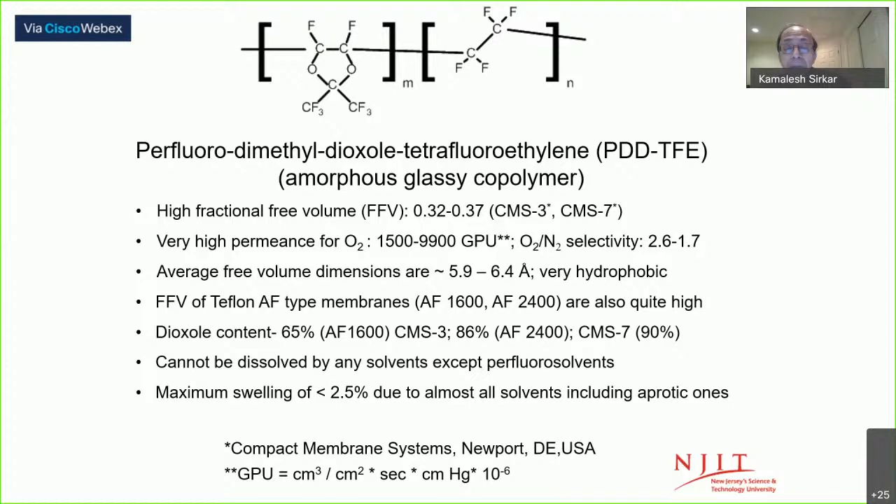These polymers cannot be dissolved by any solvent except perfluorosolvents. And we have studied their swelling in all sorts of solvents, including DMSO, DMF, NMP, etc., and it's less than 2.5%. And so those are very useful for the purpose of separation of organic solvent mixtures.

I'm repeating that information at the top left part of this slide. The CMS7 has average free volume radii of 5.9 to 6.4 angstroms. Corresponding radii estimates in normal glassy polymers are going to be around 3 to 4 angstroms at the most.

And interestingly, most organic solvents, if you think in terms of their diameters, by assuming these are spheres, that's around 5 to 7 angstroms. They'll slip through CMS7 without much diffusivity-based selectivity. And need I remind you that selectivity of separation through a polymeric membrane is usually considered to be a product of diffusivity selectivity and solubility selectivity.

So if in fact we have such large free volume dimensions, and we have such large fractional free volumes, how can you have any diffusivity-based selectivity? These molecules are just going to slip right through every one of them. And so selective sorption potentially could be very interesting.

And there have been some studies that were initiated in the last 15, 20 years, quite a few studies. And they have been looking at the free volume size distribution using the PALS technique and so on and so forth. So my information regarding the average free volume dimension, 5.9 to 6.4, is based on some of those studies.

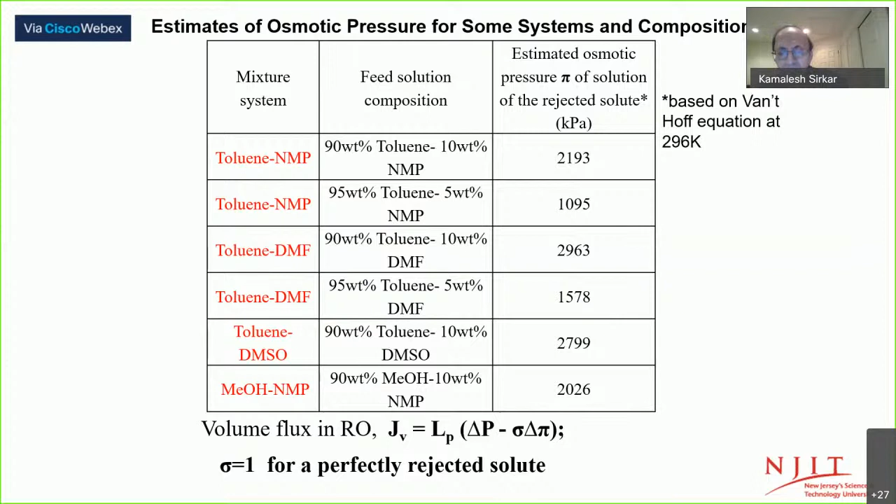So here we are showing data on a mixture of toluene and NMP. If we have 95 weight% toluene in feed, 5% NMP, or 90 weight% toluene or 75 weight% toluene, and if we apply appropriate pressure, what we see is that the permeate coming out has pure toluene. We were surprised and very shocked at this because this is unusual.

Of course, the fluxes are somewhat on the low side. You see the pure toluene fluxes are significantly higher. That, of course, reflects the fact that we have a significant osmotic pressure. But we are getting pure toluene in the permeate over this concentration range.

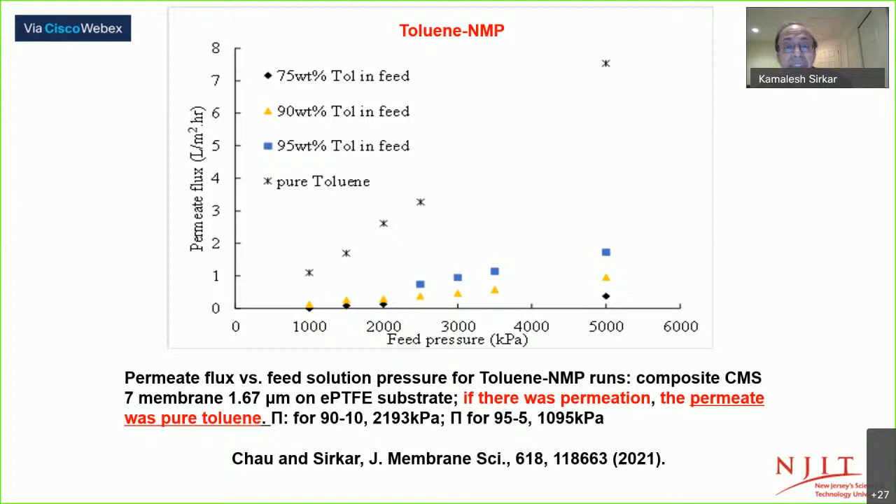But before I go into that, I wanted to show you something. We took this polymer and soaked it for 14 days in feed mixtures that contain either 90% toluene, 10% NMP, or 90% toluene, 10% DMF. And then took this polymer out and put it in a headspace device.

Connected to a GC gas chromatograph and stripped out the sorbed solvents at a high temperature. And what we found out is that the sorbate was 100% toluene in both of these cases. In other words, toluene is not allowing NMP and DMF to be sorbed in this particular polymer. This is a phenomena that we will see repeated with various other compositions that we'll talk about.

Now, if I can recall some of the very basic conclusions known to membrane scientists and engineers, if you take the Spiegler-Kedem model for reverse osmosis, you achieve a very high solute rejection when you go to very high delta P, and that value is equal to the solute reflection coefficient. If you use irreversible thermodynamics models, you see at very high pressures you achieve a solute rejection that's 1 minus the solute partition coefficient. In our case, if the solute is being rejected completely, sigma sub j would be equal to 1 and kappa sub j is going to be 0. So we'll be having a rejection of 1. But interestingly, we achieve that rejection of 1 at very low pressures.

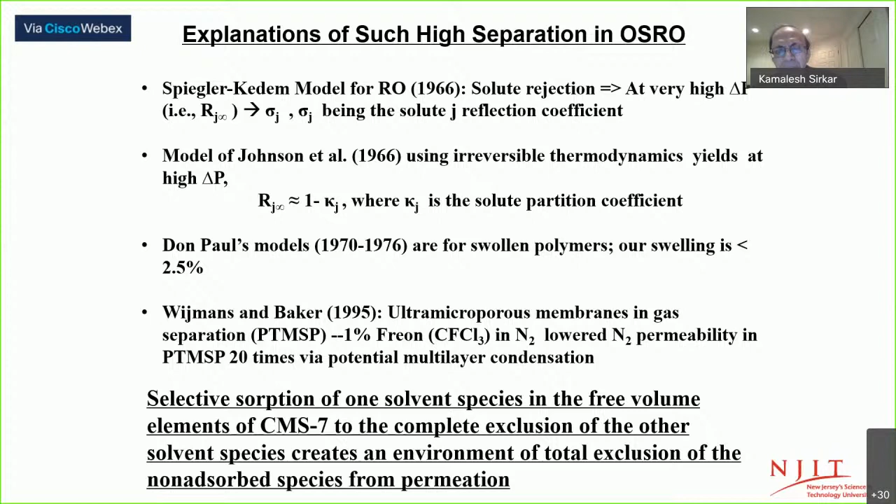In that case, they found out that if they had 1% freon in nitrogen, that freon will condense, probably in multi-layer in the free volume regions and in the transport corridors. And they're going to block out nitrogen permeability very substantially. Now, we haven't gotten or seen any such results in our case. If we have 1% concentration of a species, we don't see any specific effect. So we are forced to conclude that in our case, selective sorption of one solvent species in the free volume elements of CMS7 to the complete exclusion of other species is creating an environment of total exclusion of the non-adsorbed species from permeation.

Here we are showing some results with methanol and NMP, N-methylpyrrolidone. Interestingly, these are both extremely polar. Methanol is protic, NMP is aprotic. Interestingly, also the polar component of solubility parameter for both of these solvents is identical, 12.3. They're very polar.

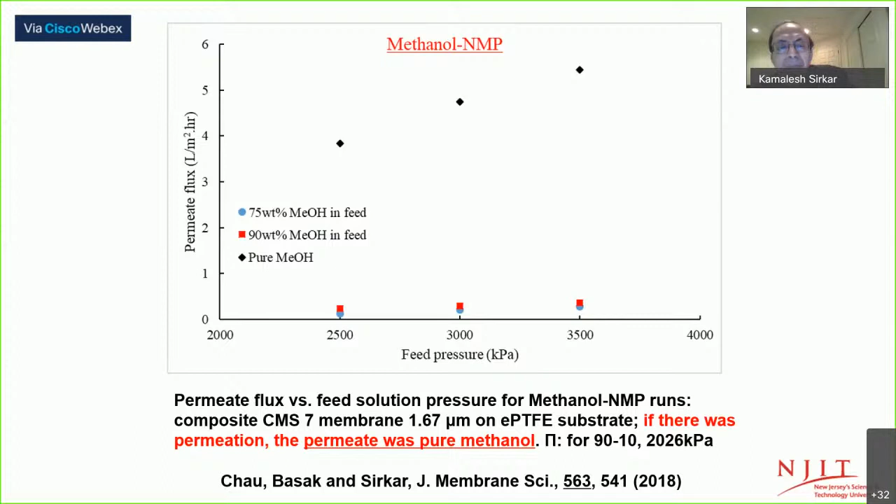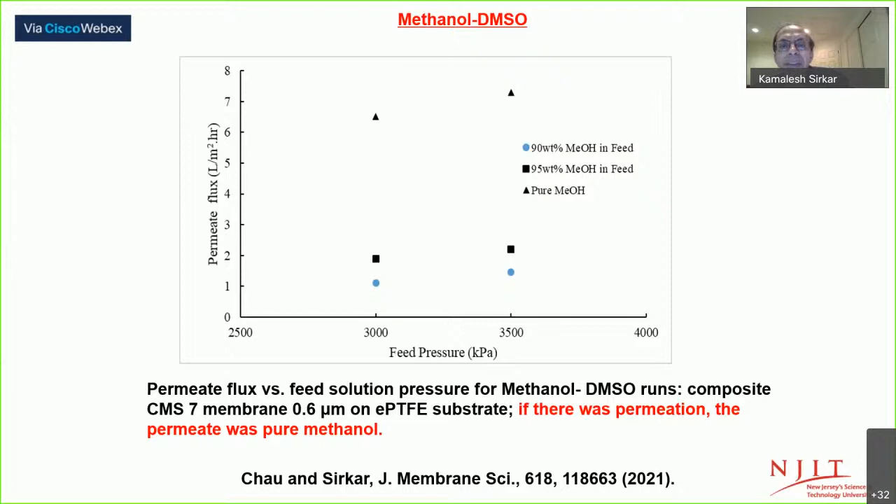Yet, when we subject this polymer to this particular solvent mixture, for 75 weight percent methanol in feed or 90 weight percent methanol in feed, we see pure permeate of methanol. We see a similar behavior when we have methanol DMSO. Both are highly polar, yet 90 or 95 weight percent methanol in feed gives us pure methanol in permeate.

And the conclusions we have were reinforced when we did some sorption studies. We took 90% methanol, 10% NMP, and we studied sorption behavior and then desorbed it in a headspace apparatus at a high temperature. We found out the sorbate is 100% methanol. How come?

What we have seen in the literature is that other perfluoropolymers have been studied, and with pure alcohols, transport through the polymer can only be explained by assuming the molecules are dimerizing. I've shown the model of two methanol molecules dimerizing, with methyl groups at their ends that can accommodate themselves easily in the hydrophobic free volume cavities of this polymer. Methanol is able to dimerize and occupy the free volume space. NMP does not have that capability because NMP is aprotic.

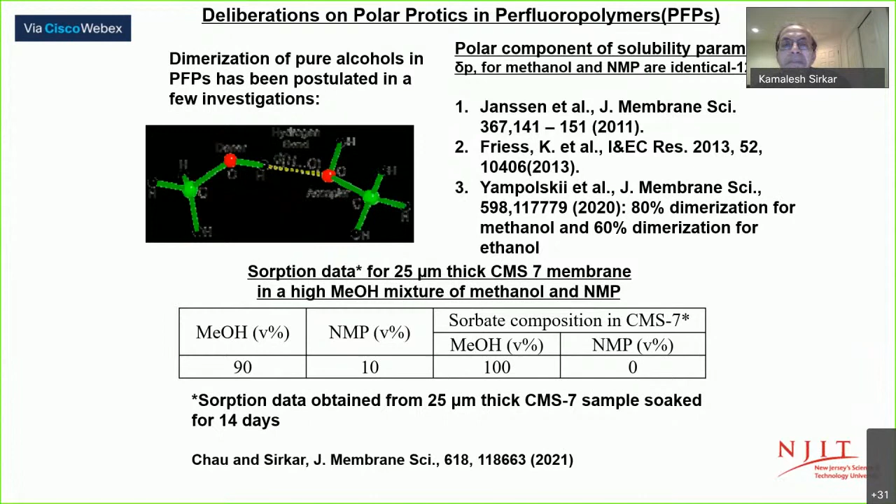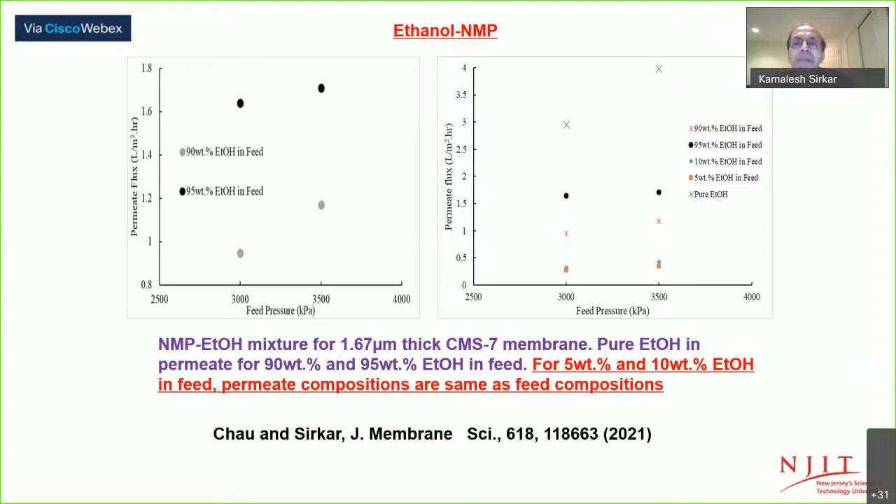This concept is reinforced when we take 90 volume percent ethanol, 10 volume percent NMP - the sorbate is 100% ethanol. We have to do this for other compositions as well, and we should be doing that.

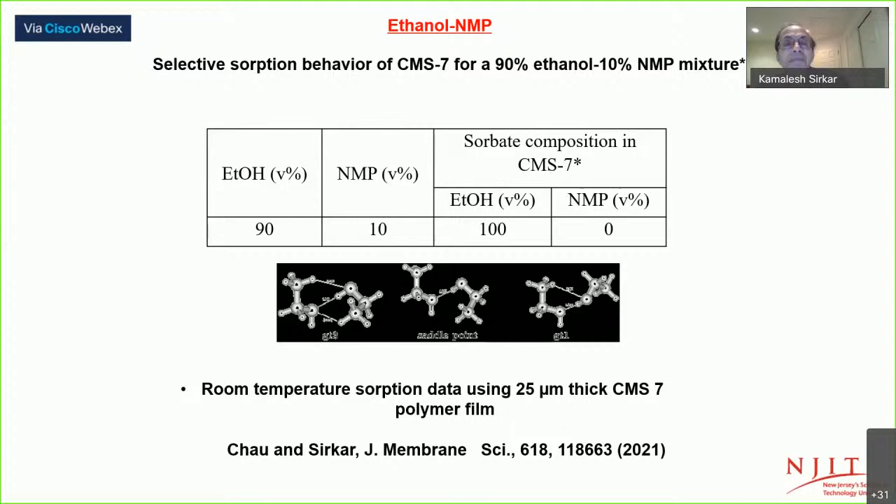Now I have a very different system: ethanol and butanol. Both are protic, both can dimerize for that matter. And lo and behold, what do we see? If we have 90% ethanol in feed, my permeate is pure ethanol. If I have 90% butanol in feed, I have pure butanol in the permeate. So both have the capacity to dimerize, which others have seen, but the dimerization tendency decreases as you go to larger hydrocarbon ends. If you go to C6, C7 alcohols, this dimerization tendency essentially disappears.

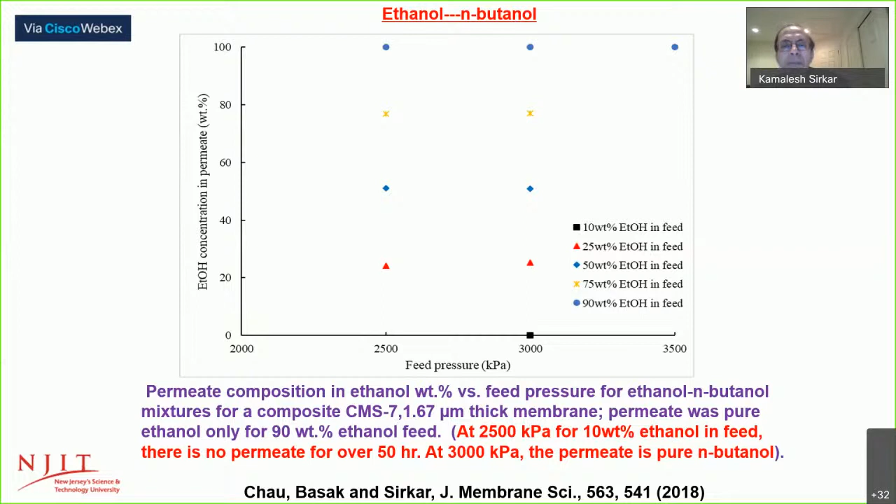You may also not be able to accommodate them in the free volume dimensions available in this particular copolymer. So we also checked the sorption behavior. With 95% ethanol, 5% butanol, the sorbate is 100% ethanol. But with 5 volume percent ethanol, 95 volume percent butanol, the sorbate is 100% butanol. When we have 50-50 mixtures, it's 50-50 sorption - there is no difference.

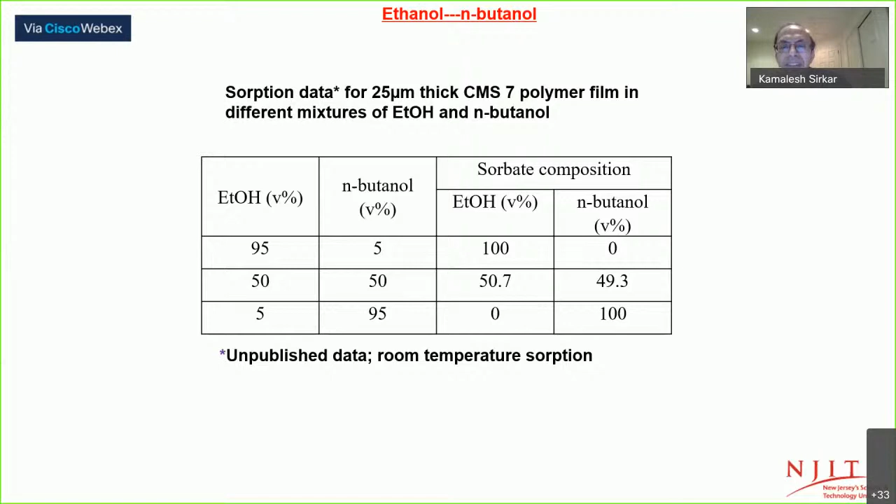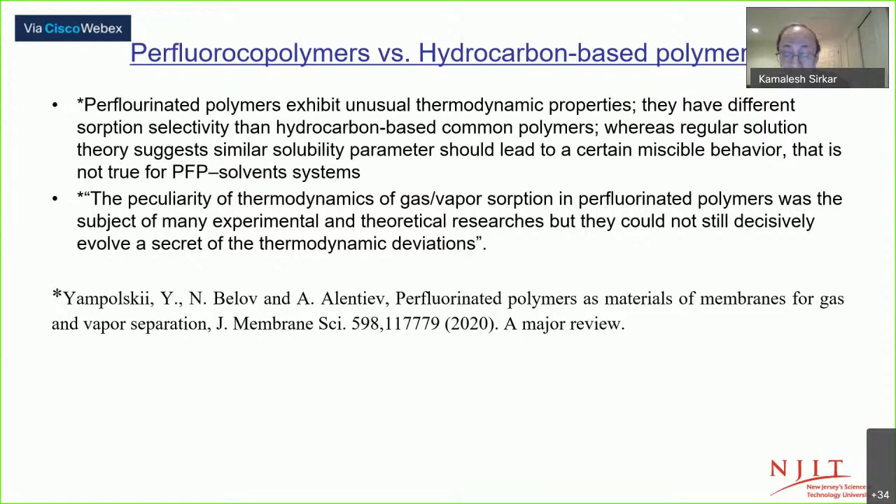So I'm not going to show more results that we are trying to develop, but I'd like to point out some conclusions that Yampolskii, who has studied these polymers for a long time, made: that these polymers exhibit unusual thermodynamic properties, with different sorption selectivity than hydrocarbon-based common polymers. Similar solubility parameters should lead to certain miscible behavior, but that is not true for PFP solvent systems. Many general attempts have been made to develop a model for these things, but so far nothing has appeared. I would leave this topic for now - it's very interesting, and the experimental results coming out are very interesting and of extraordinary industrial significance.

I'm going to switch the topic to something totally different. We are going to discuss gas vapor mixtures in the presence of humidity, and talk about graphene oxide-based membranes as barriers against toxic vapors and gases.

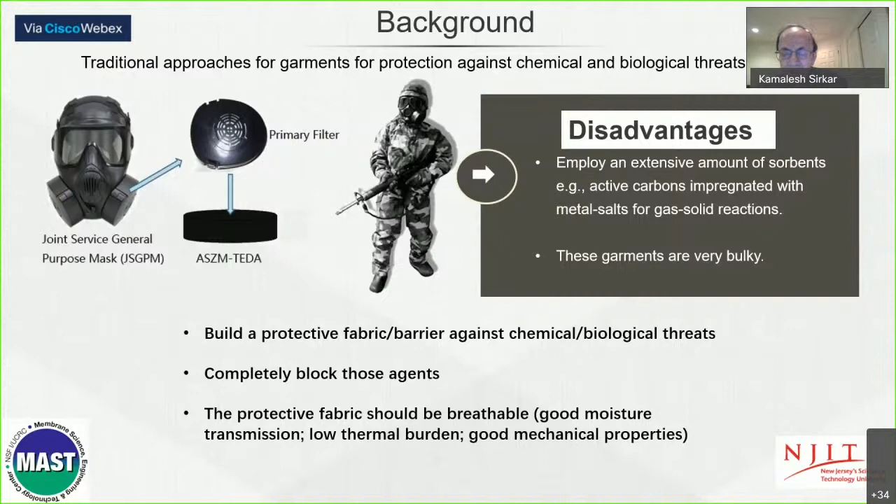If you think about garments or masks, what is commonly done is employ an extensive amount of sorbents, active carbons, sometimes impregnated with metal salts for gas-solid reactions. But these garments are very bulky. The question posed to us was: can you build a protective fabric or membrane barrier against chemical and biological threats that completely blocks these agents? The protective fabric should be breathable with good moisture transmission, low thermal burden, and good mechanical properties. I'll show you some of the progress we have made.

One of the very interesting things about graphene or graphene oxide-based laminates that people have studied for the last 10-12 years is that the major transport pathway for gases or vapors is structural defects within the flake, instead of spacing between flakes. You can have very high selectivity - there are particular studies of selectivity for hydrogen over CO2.

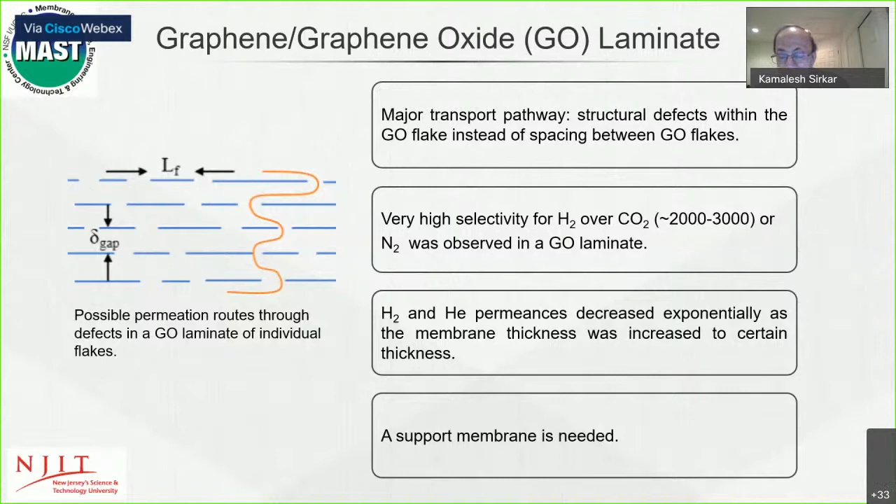In certain GO laminates, hydrogen and helium permeances decrease exponentially as the membrane thickness is increased. Also, you have to support such a laminate on a support membrane, preferably a porous support membrane in general.

Our graduate student dispersed a certain amount of GO powder in DI water in the presence of some SDS and sonicated quite a bit, then added some EDA, which is ethylene diamine, because that is going to be used to cross-link contiguous layers due to the polar functional groups sticking out at the edges of graphene.

A certain amount of EDA is dispersed in that solution, and then you filter this solution over a porous polyether sulfone or porous polyether ether ketone membrane by vacuum, dry the membrane, and physically compress it because there's a lot of unevenness. You would like to reduce that, then heat the membrane to 80 degrees to create cross-linking, and spray on top with a thin coating of polyurethane so the membrane can be bent and folded and used easily.

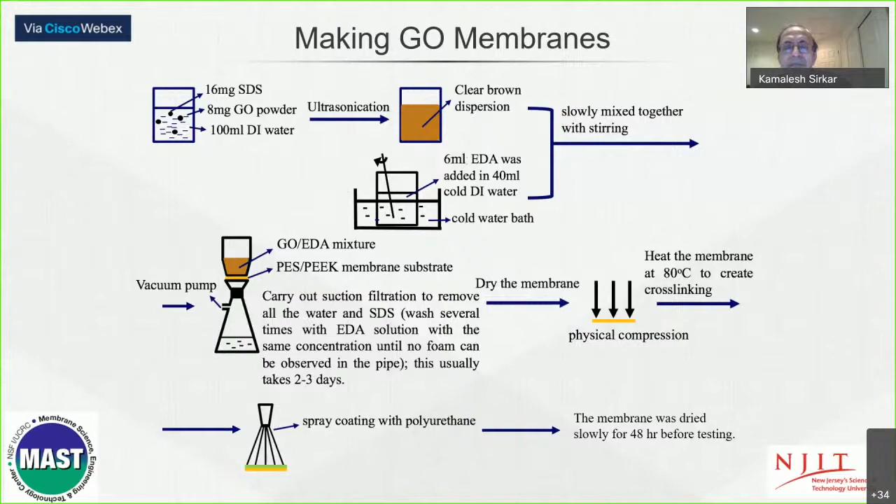We studied the permeation of various gases, vapors, and water vapor through this membrane using two different types of apparatus. The dynamic moisture permeation cell has humidified or non-humidified feed gases going on top of the membrane, and at the bottom you have a helium stream picking up whatever permeates through the membrane and going into the gas chromatograph.

Another method to study permeation: you have a membrane, and at the bottom of that membrane a reservoir of the liquid whose vapor permeation you are studying. At the top it's open to the atmosphere, and you keep this essentially in a desiccator where, for example, if moisture is coming out, it will be absorbed by the desiccator. Every day you weigh the plastic container to see what weight is being lost. If water is evaporated, its weight would be decreasing.

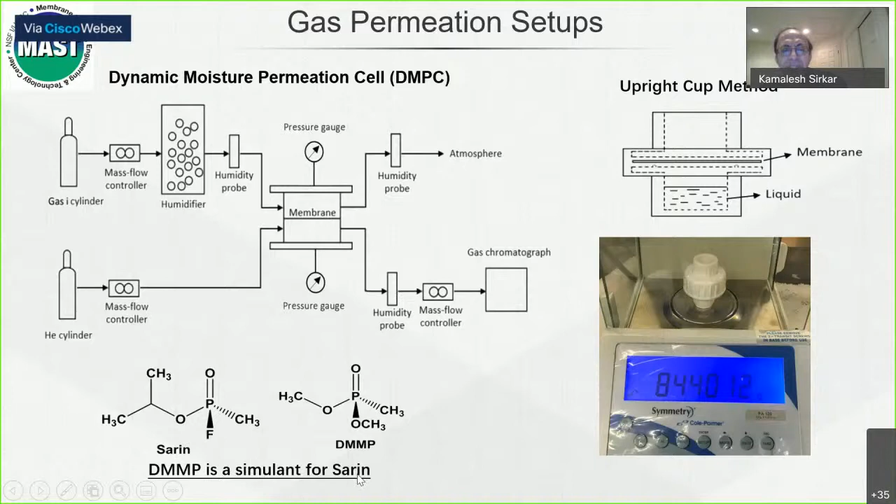We did that for water, toluene, and a few simulants for various bad gases. DMMP, which is dimethyl methylphosphonate, is a simulant for sarin, and that is the type of membranes that we were preparing.

After all of the things are done and a polyurethane coating is there, you can bend it easily quite a few times without affecting their permeation properties.

These are FTIR spectra of the cross-linked GO membrane, and these are XRD for the GO membranes. We have gaps that are quite intense in the 0.4 nanometer range, which is the normal gap we should have in a graphene or GO laminate. However, because of N groups on the edges and so on, you have other gaps. These are some of the other gaps in our laminated membrane.

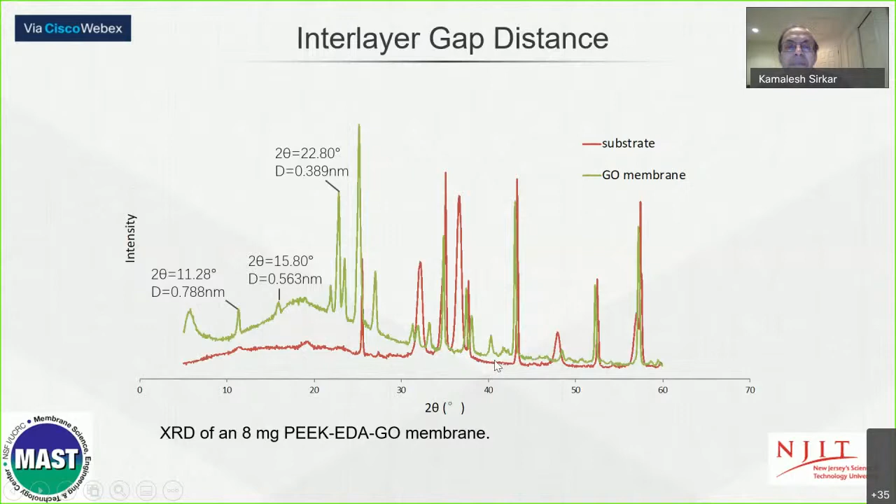Here are some data showing blockage of DMMP and toluene, whereas water vapor is freely permeating. Looking at the upright cup method, where you had a layer of liquid at the bottom which was evaporating, the weight of that cup was decreasing linearly every single day. Whereas if we did that experiment with pure DMMP liquid, the weight did not change at all because DMMP was not able to go through the membrane at all.

The same thing happened with toluene—it was not able to go through at all, whereas water was continuously disappearing. In a 15-day experiment, DMMP was not able to cross it for 15 days, and water vapor, of course, disappeared, and we had a dry stuff. So DMMP, given its dimensions, would potentially be blocked by the defects that we had seen.

This particular table shows that whether you have a bent membrane or a non-bent membrane, the permeance and selectivity of the gases are very, very similar.

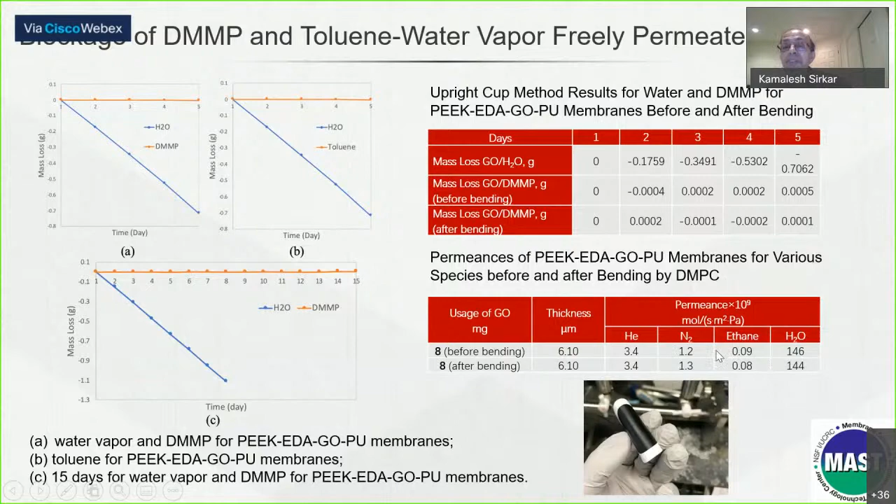Experiments were done with a simulant for sulfur mustard, which is 2-CEES. For the first 16 minutes, nothing came through, and after that there was a steady permeation for a long length of time. Experiments were stopped here at the level of 0.2 milligrams per meter cubed of 2-CEES.

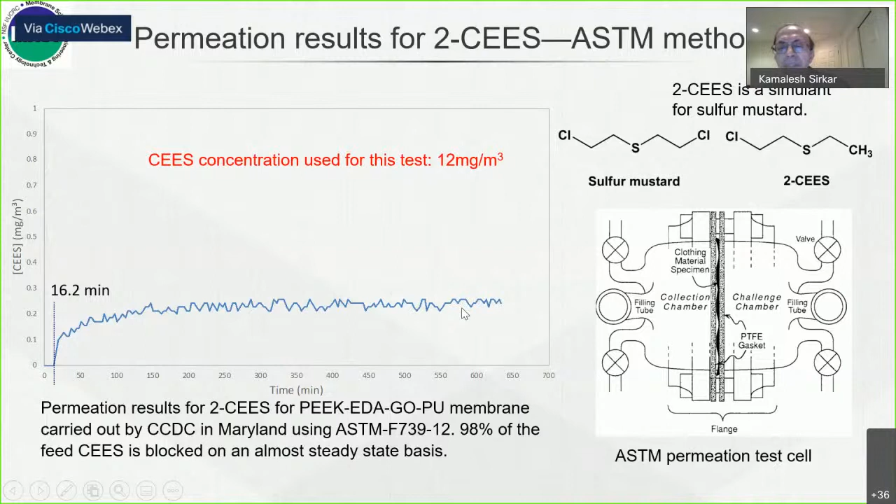At the full concentration being used, if this membrane had no blockage capacity, it would be 12 milligrams per meter cubed. So we were having 98% plus rejection of this, and that's a good start. We are looking at other ways to improve such behavior.

These membranes also have significant tensile strength so they can be bent and used for very practical purposes. This is an interesting area. It doesn't directly affect today's overwhelming consideration with COVID-19, but it certainly has a lot of relevance, especially for situations dealing with industrial accidents or other kinds of warfare situations.

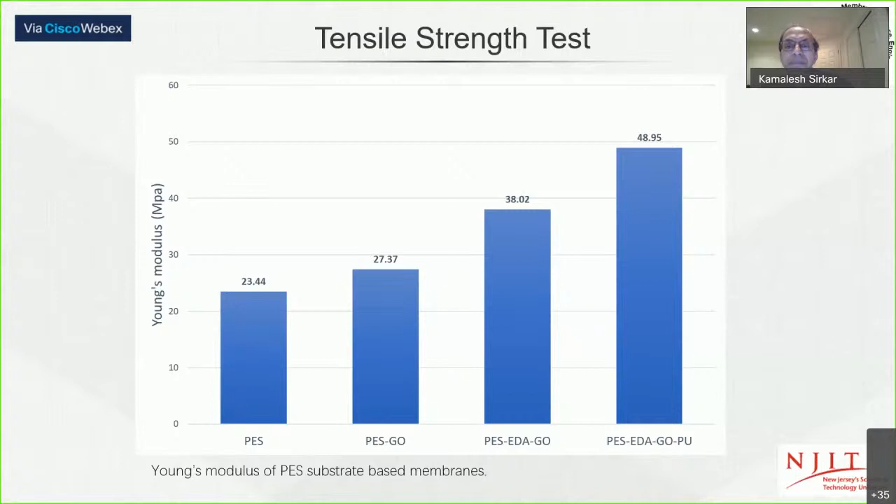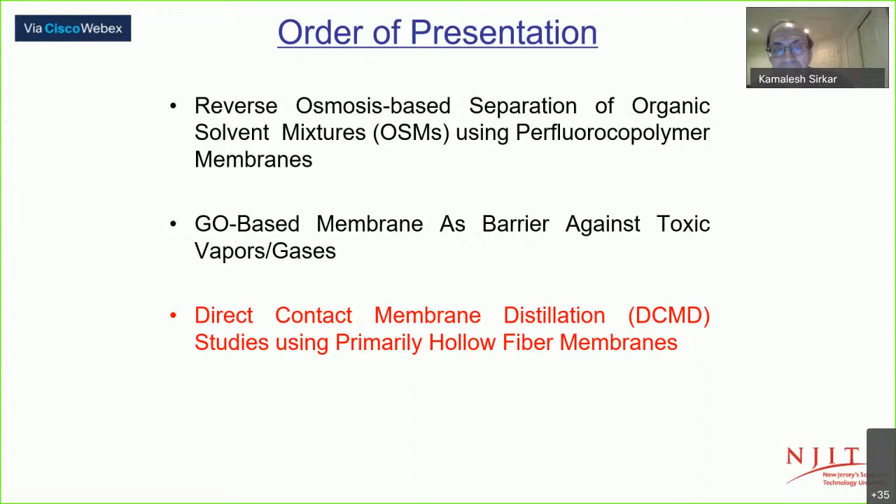I'm going to focus now on the third topic, again very far away from the second topic. This is direct contact membrane distillation studies using primarily hollow fiber membranes.

Some of you may be aware that if you have a porous hydrophobic membrane, something like a Gore-Tex membrane, and you bring hot brine on one side, at atmospheric pressure the hot brine cannot enter these hydrophobic membranes. If you keep cold water on the other side, water vapor will evaporate from the hot brine and come and condense in the cool distillate.

Professor Wickramasinghe is going to go into details of many studies that he has done, and I'm going to talk about something slightly different in terms of the challenges we are trying to overcome. You can also have vacuum pulled on the other side instead of having a cold distillate.

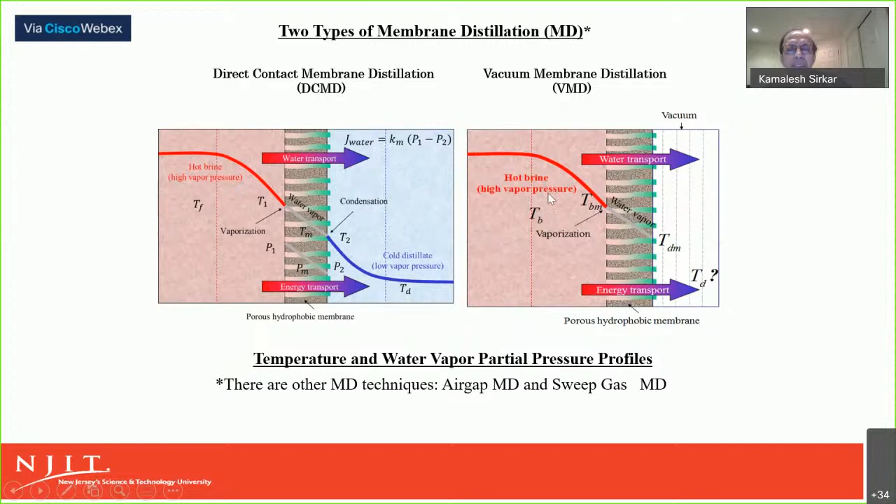Our studies are primarily with direct contact membrane distillation. We have also done some vacuum membrane distillation studies. The challenge is that if you're trying to recover 30, 40, 50, 60, 70, 80, 90%, even 95% water from saline water, it contains all kinds of scaling salts like calcium sulfate, calcium carbonate, etc.

These scaling salts, calcium sulfate and calcium carbonate, don't have much solubility. So as you start concentrating, they'll precipitate and start blinding your membrane. Many investigators are not paying attention to these things, and that is very necessary.

So what we did was we studied first with porous polypropylene hollow fibers. A company called Applied Membrane Technology was able to plasma polymerize various fluorosiloxane coatings on these porous hollow fibers.

The coating scenario we adopted is where the surface of the pores of the substrate is not covered, meaning you have a larger pore diameter of the coating. This was done with very short amounts of plasma polymerization. Essentially, if you wet even this surface, then it has to come and wet here too, but there are other advantages to this type of coating with brine in cross flow—this is another important thing.

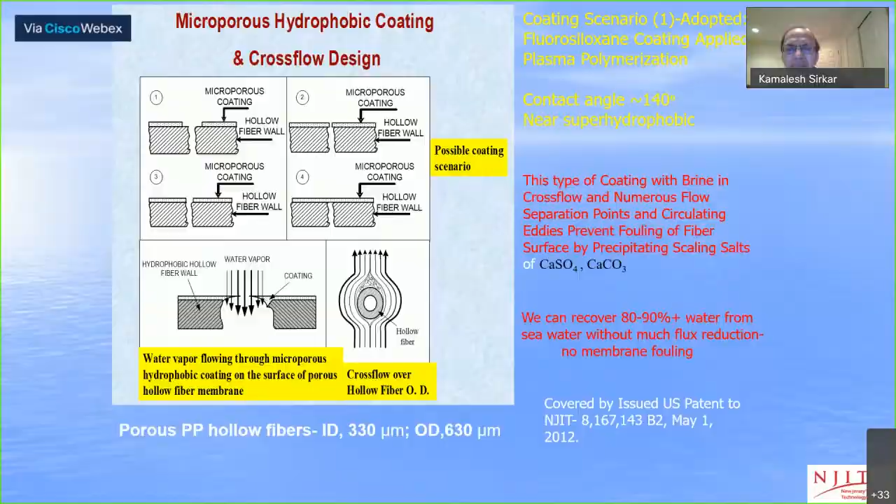So these are some photos of our devices built with the help of Applied Membrane Technology. These are the hollow fibers, and the brine was flowing normal to those. Here brine is coming in through the top, going through these fibers, and going out.

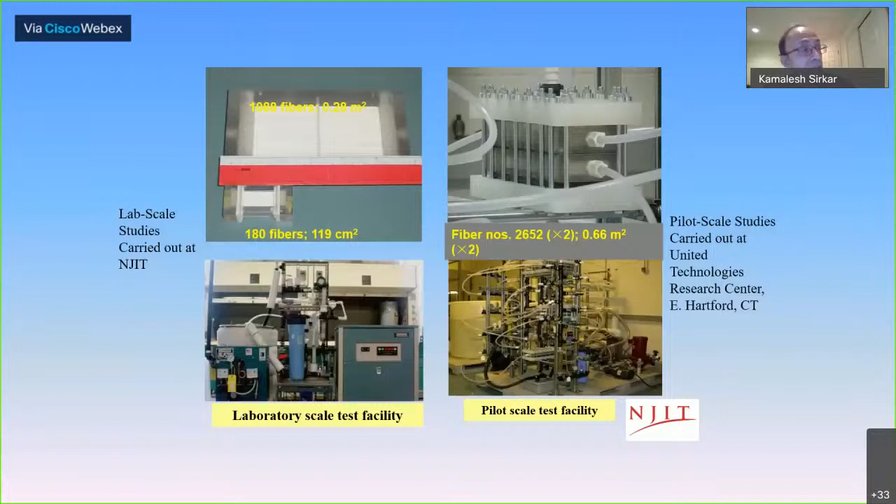We had a pilot plant that was producing close to 0.67 gallons per day—I forget now, I'll give you the exact figure—0.67 gallons per minute, GPM.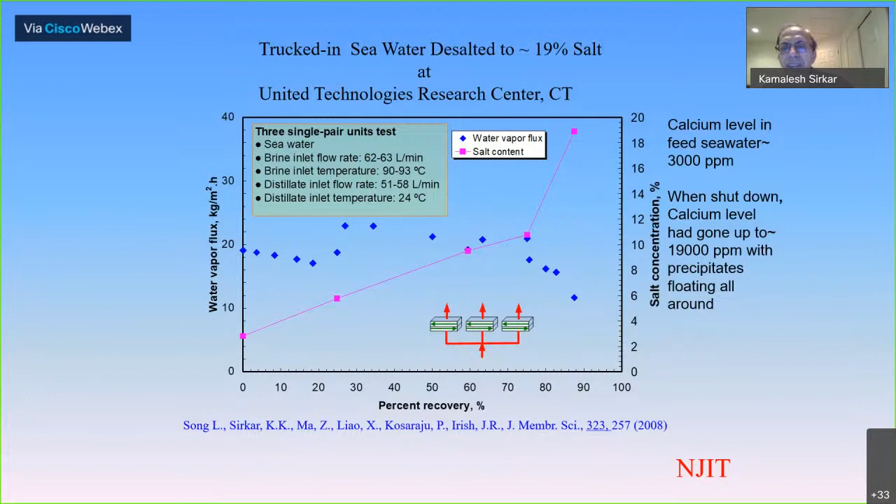All I'm trying to point out is this has been done now with very large modules in a steady state fashion. We ran the system for 5 days as we were concentrating the stuff, and we had no salt leakage at all. The basic conceptual scheme we were using is this.

If we had, say, hot brine at 90 degrees Centigrade coming in, it's getting cooled down to say 35. It comes in here, a little bit of fresh brine is added, and then you send it to a heat exchanger.

The distilled water that has collected the water vapor gets heated up to maybe 85, 88 degrees centigrade. You bring in this heat exchanger on the other side, you recover all that heat in the brine and reheat it to say 85 degrees. So all you have to do is supply 5 degrees centigrade worth of heat from 85 to 90, and then you're able to evaporate more water from the brine. You can easily have 10 pounds of water evaporated per pound of steam you're supplying, and we actually achieved results not too far from these in our laboratory.

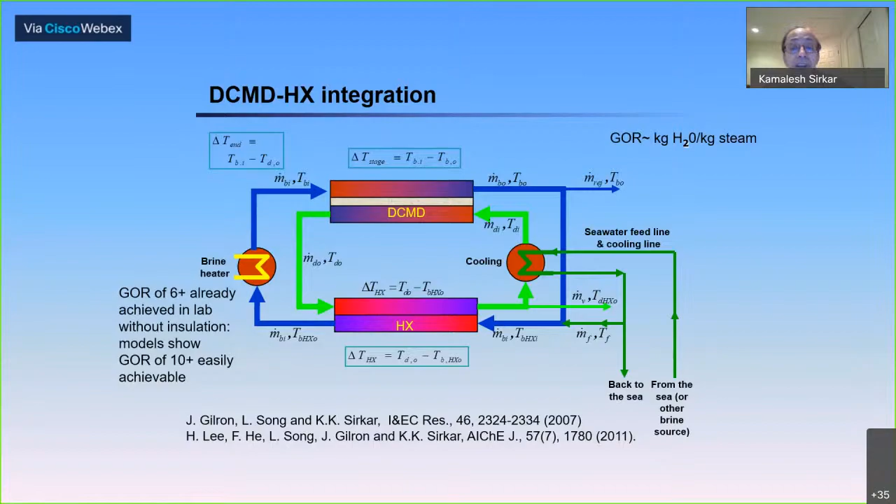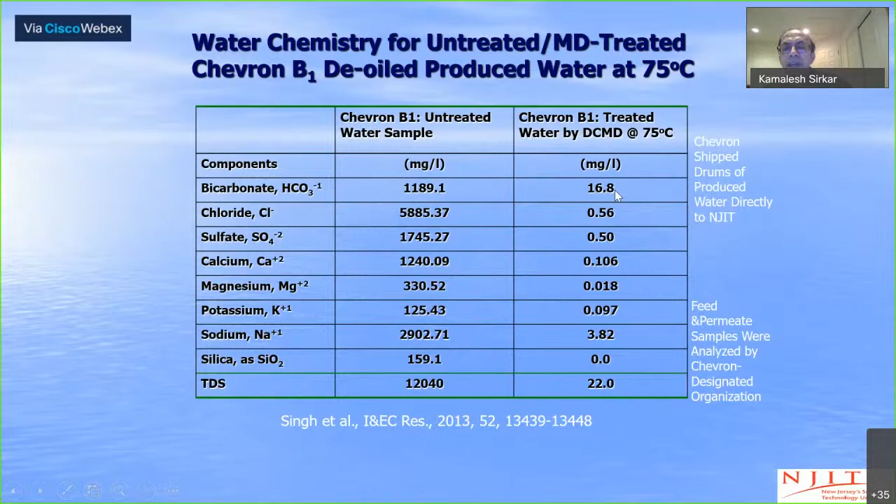We were able to show, for 3 different levels of feed concentrations, that we recovered over 80% of the water without any physical fouling of the membrane, even though we had precipitates floating around. You can see the quality of the treated water on the distillate side versus the feed side. People talk about silica, but no silica was going through this membrane. Whatever bicarbonate you see is essentially due to carbon dioxide, since you're dealing with a feed at high temperature, so certain carbon dioxide comes out and collects in the permeate.

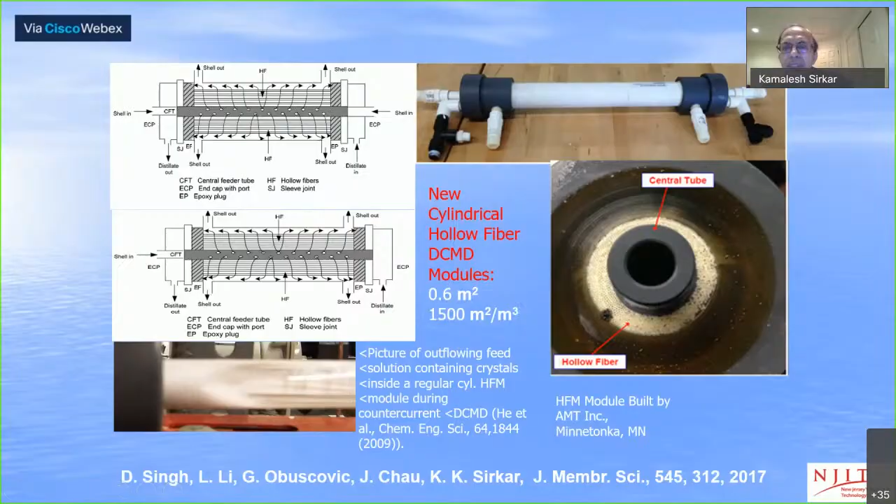The next level of modules, hollow fiber membrane modules, have been designed. These are much simpler, lightweight hollow fiber modules that have 5 times more surface area and do not suffer from the accumulation of precipitates of calcium carbonate and calcium sulfate, which is what happens in regular hollow fiber membrane modules. These are our new designs. We have already studied and published this, and Applied Membrane Technology is going further with additional studies after we showed something else.

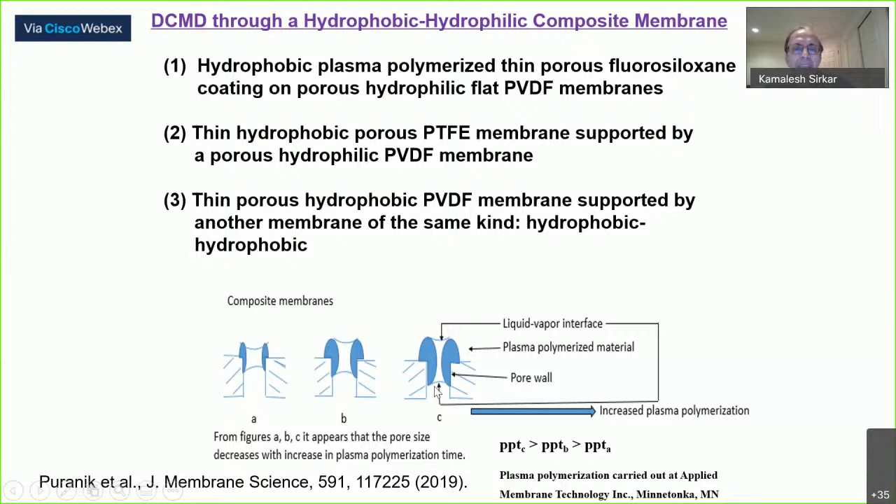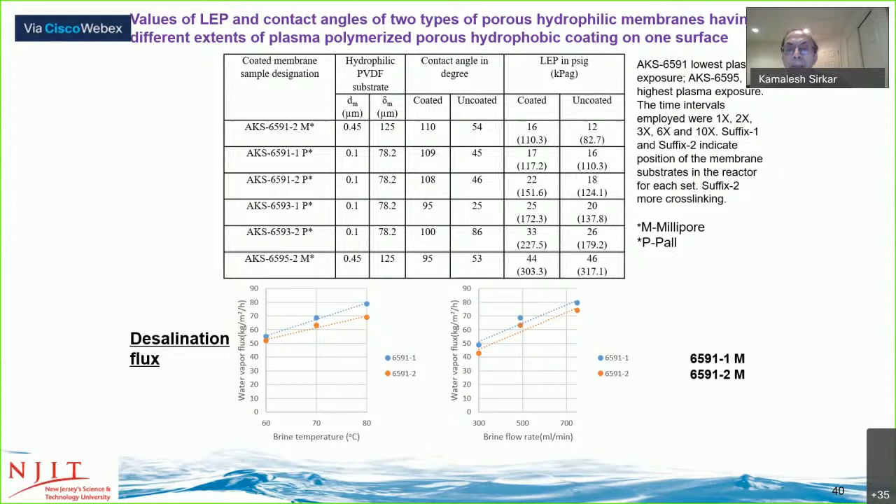We showed that you can have extraordinary fluxes with flat membranes. At 60-degree brine temperature, using just regular PVDF hydrophilic membranes with a little bit of coating, which gives a liquid entry pressure of 16 to 17 psi, we can get fluxes of 50, 55 kilograms per meter square per hour. This is huge. And now this is being tried with polyether sulfone-based coated hollow fiber modules.

These modules were developed and studied at Applied Membrane Technology. At 70 degrees centigrade, we're getting pretty high fluxes, 25 to 27 kilograms per meter square per hour. The fluxes are somewhat lower at 10% because these were simple modules - they did not develop the type of modules which eliminate temperature polarization and so on. They just wanted to study, and yet you're getting very significant fluxes, along with a significant value of LEP.

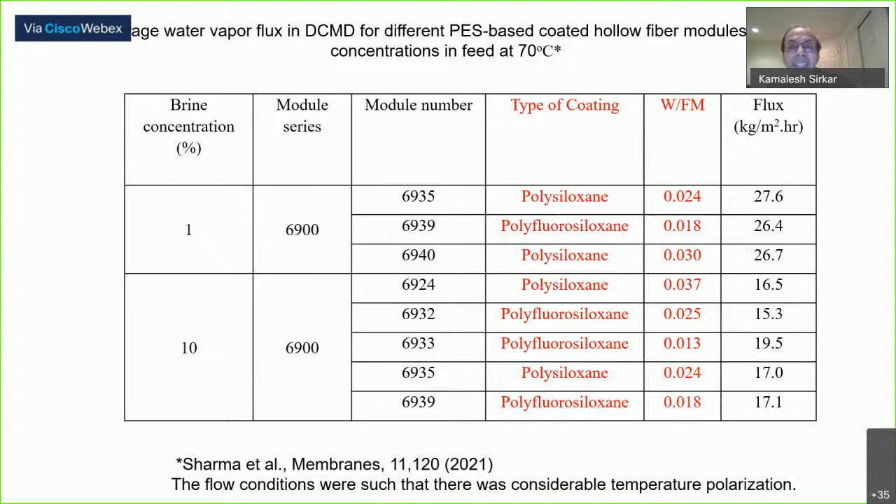There are all sorts of other studies going on in membrane distillation. I think I'll have other opportunities to present these to interested members of the audience on a future occasion. I'd like to thank you very much for the opportunity to present this, and I'd like to acknowledge support from a lot of sources.

We would not have been able to do these things unless these guys are there. They are literally everything. And with that, I'd like to conclude my talk. Hopefully I haven't taken more time than I should. Thank you.

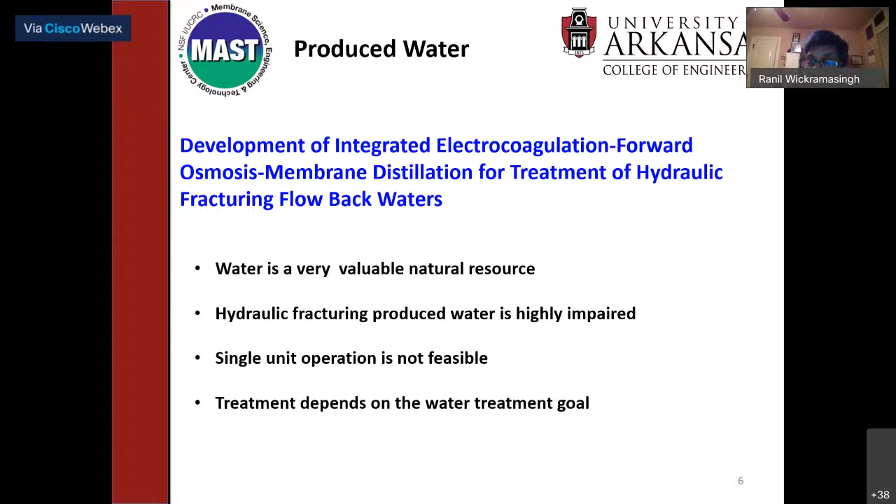The reason this topic came about is that water is a very valuable natural resource. Hydraulic fracturing produced water is highly impaired, so it's very important to be able to treat this water. What we find is a single unit operation is unable to treat the water; we have to have an integrated process. What's also important to remember is the amount of treatment you do depends upon the treatment goal.

Here's a schematic representation of the hydraulic fracturing process. Basically, a well is drilled deep into the Earth's surface, more than 1 kilometer in depth. Then it's turned horizontally and continues up to maybe another 3 kilometers in length. The oil and gas is in this shale-bearing formation that's highly impervious.

Because of the very low permeability, conventional processes will not enable you to recover the oil and gas. So instead, one pumps water at very high pressure down this drilled well, and the water contains various additives: proppant, which are basically sand particles, viscosity modifiers, surface tension modifiers, and surfactants, and so forth. This is pumped down at high pressure, and the water causes fracture of this rock formation. The proppant or sand particles go into these fissures.

The pressure is released, and we get hydraulic fracturing flowback water being recovered together with co-produced water. But the fissures cannot close because these sand particles or proppant prevent them from closing. So we've artificially increased the permeability of the rock formation, which allows us to then recover the oil and gas.

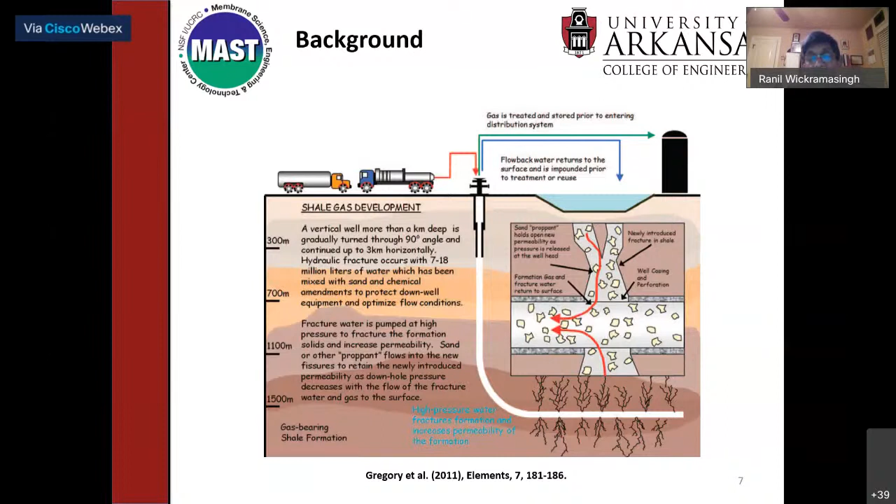I mentioned that the treatment depends really upon the treatment goal. So if the aim is to take this water and deep well inject it into a geologically isolated formation, the amount of treatment that's required is minimal, and it's known as primary treatment.

Typically, the water comes up from the ground with the oil. One takes off the oil, then there's a little layer of oil on the surface of the water, which is usually addressed by oxidizing it with something like chlorine dioxide. After which one goes to primary treatment, typically gravity separation and centrifugation, and then the water is deep well injected into a geologically isolated water body. It's very important that this highly impaired water doesn't contaminate other water bodies that could be used for beneficial purposes, for irrigation and so forth.

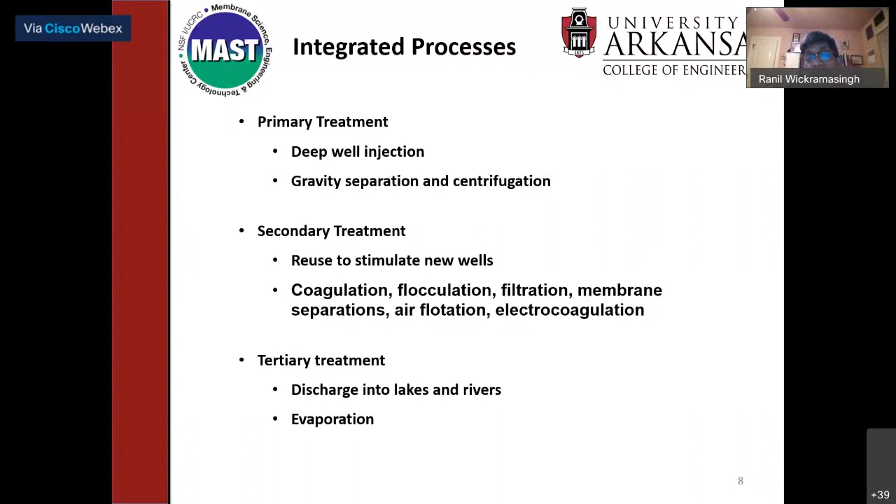If one wants to reuse this water to stimulate other wells, the amount of treatment required is somewhat more. One uses coagulation, flocculation, filtration, membrane separations, air flotation, electrocoagulation. Processes like this are used to remove additional components because, in particular, the water can cause corrosion of the drilling equipment. So you need to remove these compounds before you can reuse the water for stimulating new wells. And finally, if the aim is to discharge this water into lakes and rivers, one has to treat even further, typically using evaporative processes.

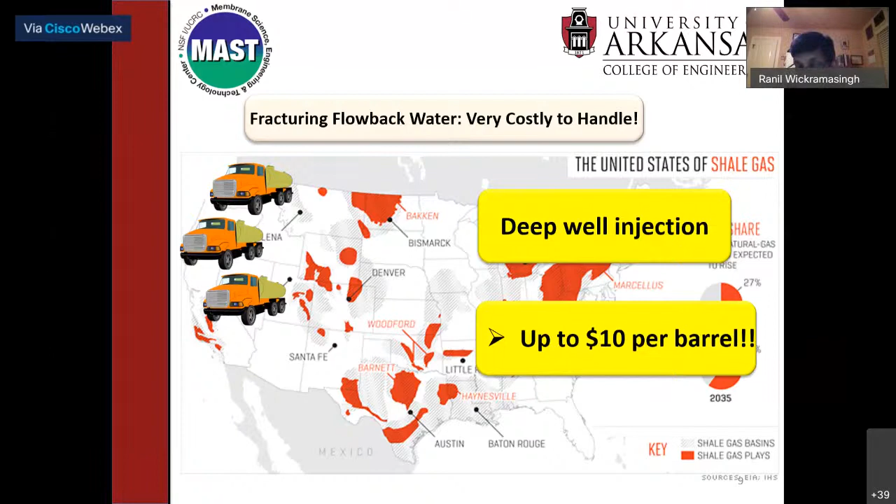Today in the US, the major way of disposing this water is to truck it to a geologically isolated formation where it is deep well injected. The problem is one is trucking a huge amount of water all over the place, which isn't very environmentally friendly. It's expensive, up to $10 per barrel, but most importantly, it causes earthquakes. I live in Arkansas, which is a geologically very stable, very old area, and when I first moved here there were quite a few earthquakes. The earthquakes come not so much from the hydraulic fracturing operation, but when one tries to re-inject large amounts of water into the earth.

So this project started in the MAST Center, and the aim was to recover as much water as possible and end up with a very high TDS brine or sludge that minimized trucking costs, because that would then be trucked, and the treated water could be used for various possibilities.

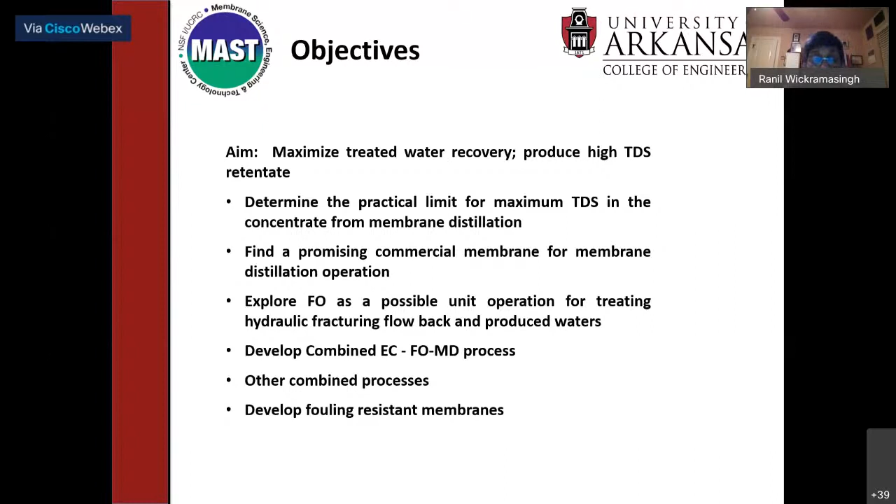We started by trying to determine the practical limit for the maximum total dissolved solids, or TDS, in the concentrate from membrane distillation. We worked with commercially available membranes and tried to find promising ones. We then moved to explore forward osmosis, which I'll explain briefly, as a possible unit operation for treating hydraulic fracturing, flowback, and produced waters. But I'm going to talk specifically about this combined electrocoagulation, forward osmosis, membrane distillation process. We also brought electrocoagulation into the treatment process. I'll briefly touch on an alternative combined process, and then at the very end talk a little about some of the fouling-resistant membranes we're trying to develop and why that's important in this application.

As pointed out by Professor Sirkar in the earlier presentation, membrane distillation basically depends on passing a hot brine solution on one side of a hydrophobic membrane, with a cold distillate on the other side. In all of this work we use direct contact membrane distillation, though there are many other ways to run this process that we're also looking at. Since the membrane is hydrophobic, water cannot pass through the membrane pores, but water vapor can, and there's a vapor pressure gradient across it, especially with a high salinity feed stream. The idea is that the water vapor passes through and condenses on the distillate side. It's often stated that the water comes out of the earth at a high temperature, so the motivation is to make use of some of this low-grade heat to drive the separation process, making it attractive.

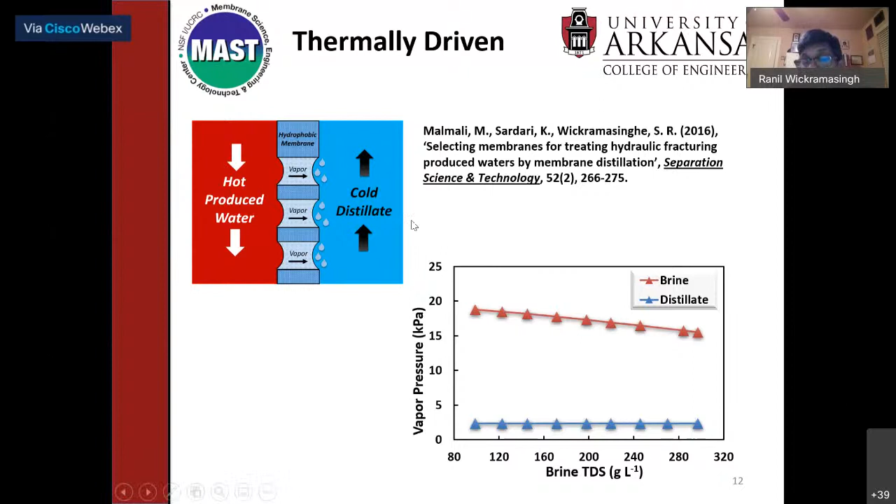But in membrane distillation, you still have quite a large driving force here, which is an advantage. So we looked at various membranes from our sponsors in the MAST Center, just to give you an idea. We looked at polypropylene, ECTFE, PTFE, PVDF, and then these superhydrophobic or coated PVDF membranes.

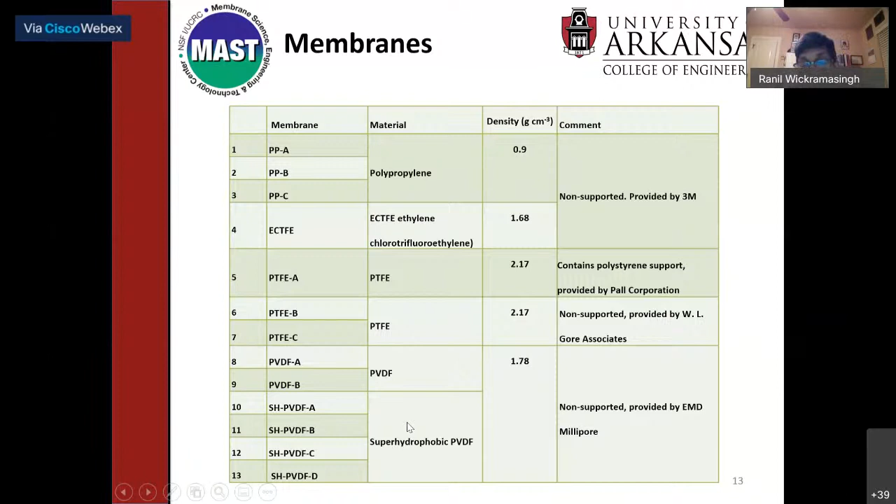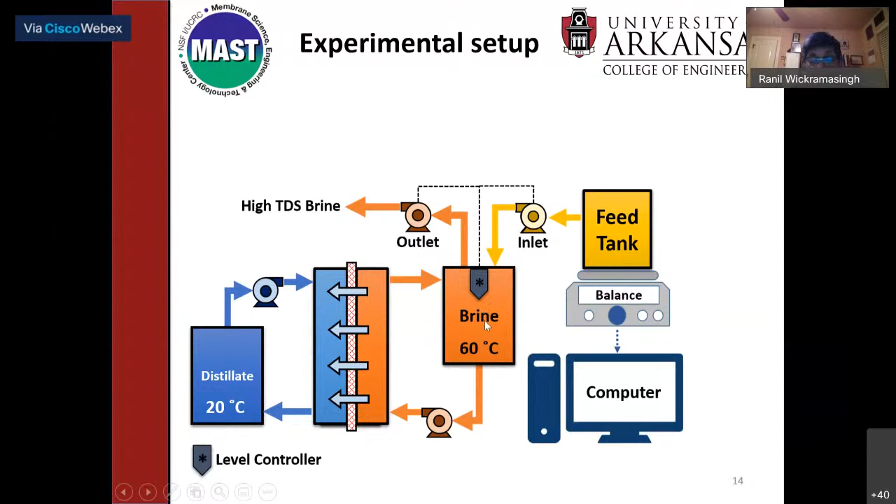So we tested these membranes. We tried to take them to the limit, in other words, the point at which you get breakthrough. So if you are testing them with, say, DI water with sodium chloride, which is how we tested them here initially—this is DI water starting off at 100,000 ppm sodium chloride—the only thing that can happen is you can get scale formation on the membrane surface. There are no other foulants present. And at some point that happens.

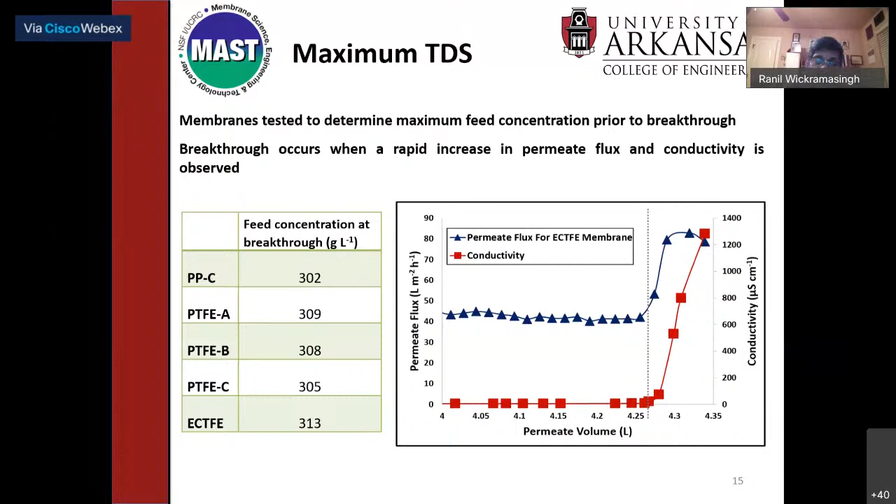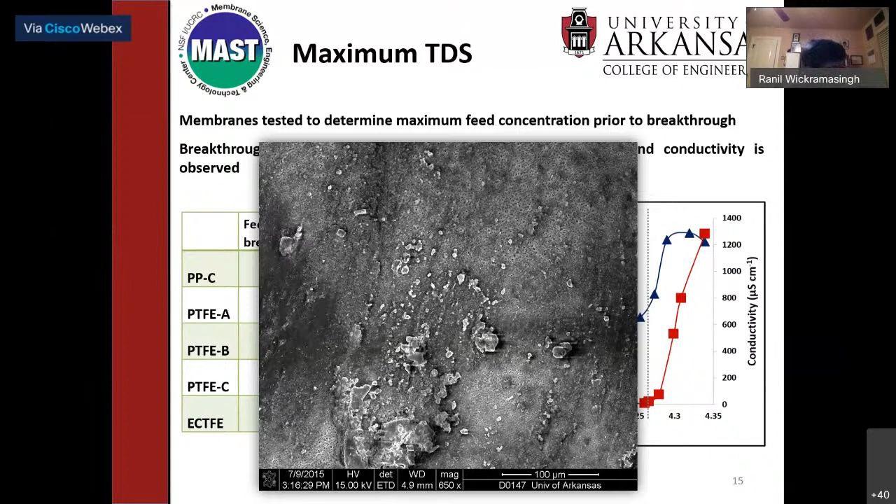Now, one of the things we noticed—and I'm going to have to plug my computer into the power because I noticed the battery is getting low.

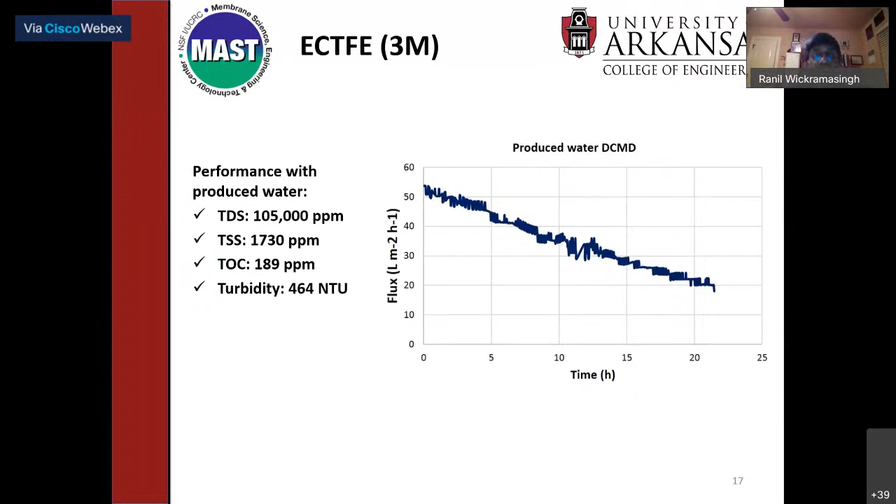One of the things we noticed is when we use real produced water, you can see that there is a decrease in flux, and this decrease is rather rapid, as you can see. So that is due to fouling of the membrane. So two things can happen when we run this process: we can get membrane fouling and we can get breakthrough, both of which lead to a severe degradation of performance.

It doesn't matter what sort of membrane you design, feed pre-treatment is going to be essential. There are really three contaminants: suspended solids, dissolved solids, and organic compounds. Remember that this feed stream contains surfactants and other polar and non-polar organic compounds.

The membrane has to be hydrophobic because you don't want water passing through, so it has to be oleophobic as well to prevent adsorption of oils. But it's more complicated than that because you also have surfactants and low surface energy compounds, and so simply lowering the surface energy sometimes doesn't help. Pretreatment is essential to try and remove some of these organic compounds.

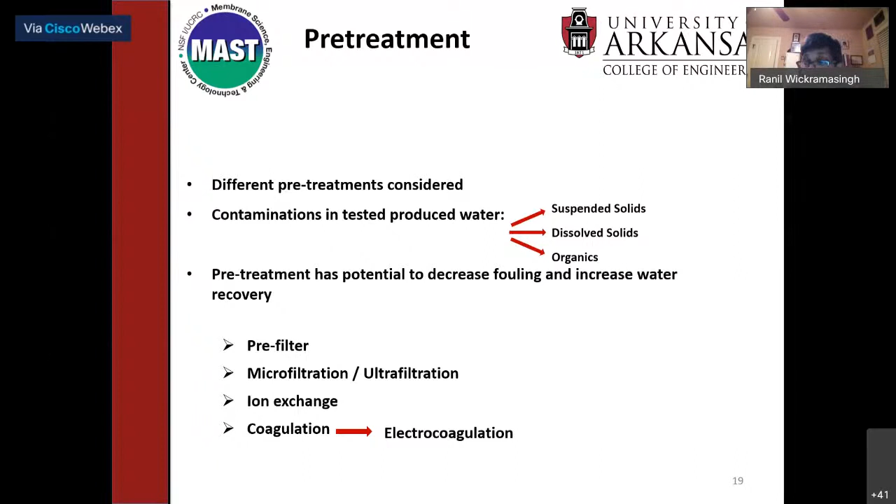There are various possible pretreatments that people have looked at. We chose to look at electrocoagulation. Electrocoagulation is very similar to coagulation, but it was advantageous for us because all you need to do is change the electrodes. So if you imagine running this somewhere in an oil field, the amount of material you have to transport is not much, just the electrodes, not a whole lot of coagulant. Electrocoagulation was considered a process that would be quite feasible in these oil fields.

So the electrocoagulation process was used for pretreatment. The electrocoagulation system consists of a reactor. In this early work, we used aluminum plates, which I show here, and we used a DC power unit, as shown here. In more recent work, we have advanced this quite a bit.

It turns out with electrocoagulation, you don't have to just use aluminum. You can integrate these, you can have aluminum and iron, and so forth, and there are benefits to that, especially depending on the type of contaminants you have present. You might actually have better, more efficient removal of certain flocs if you have iron. And what is also important is that the flocs densify quickly, and are not light flocs that are not easy to densify and remove. So we have now developed a process where we use a mixture of electrodes.

The other important point is that for a real, practical process, you would need to use an AC power source, because you'd want to keep switching the electrodes. If you don't, you can get passivation, an oxide film forming on these electrodes, and that will lead to a reduction in the generation of ions, which are what you need to flocculate your organic compounds.

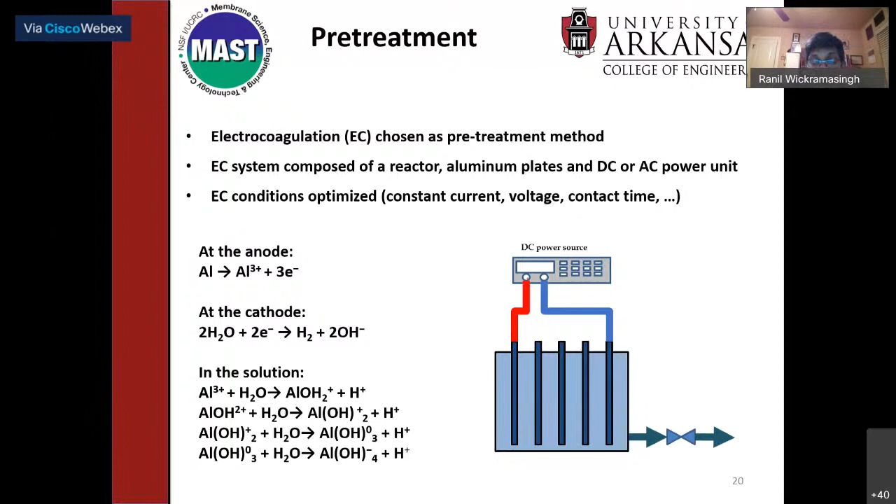So if you're using aluminium at the anode, you get aluminium ions formed. At the cathode, you basically get hydrogen gas formed. The hydrogen gas is important because as it rises, it helps in the flocculation process. In solution, the aluminium ions very soon start to form these aluminium hydroxide species, and those are the ones that are then able to capture the organic compounds. They adsorb on the surface and you form these flocs.

Initially, the flocs are very light and low density. They rise to the surface, they start to densify, and then they fall down again and settle at the bottom. So our aim was to recover the clear water, the treated water after flocculation.

Now, in this early work, again, what we did is we used electrocoagulation. We induced flocculation or coagulation. We then waited, let it sediment, basically. So we waited, and the sedimentation time can be up to 8 hours or more. In that sense, it's not a very practical process - you have to wait a very long time.

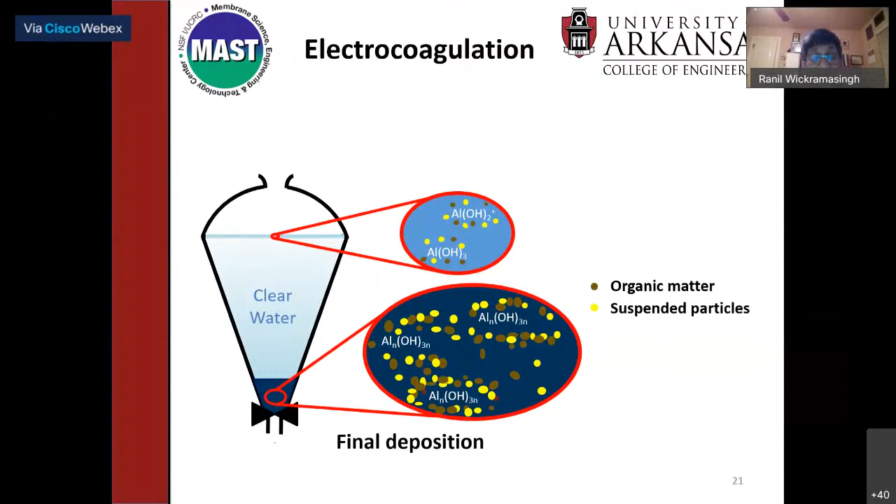I'll also give you an example of an alternative process as we go through this. But in this work, we waited for sedimentation. We took the water, and then we ran it into the membrane distillation system.

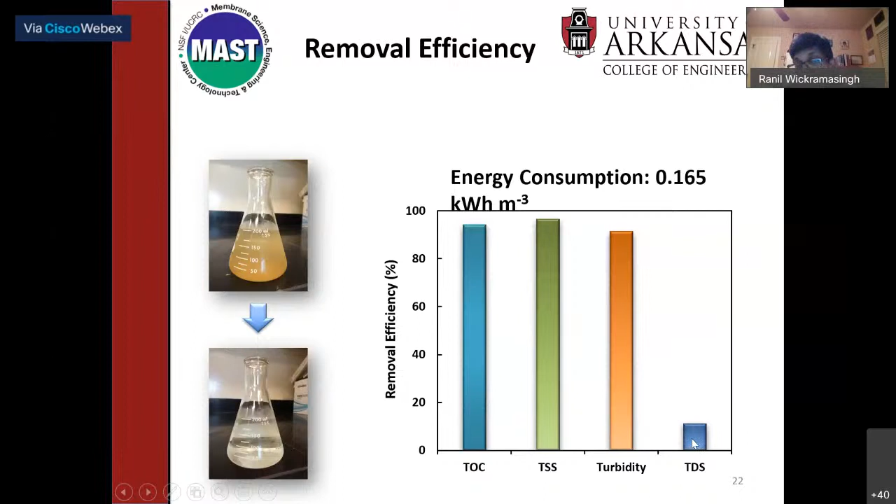This is an example of the actual produced water, and below that, you see the produced water after electrocoagulation. For the specific conditions we used here, we got very efficient removal of the total organic carbon, you can see here, of the total suspended solids and turbidity. So this water - electrocoagulation was very successful in removing the compounds you want to remove. It's not designed to remove dissolved ions, so the TDS doesn't change much.

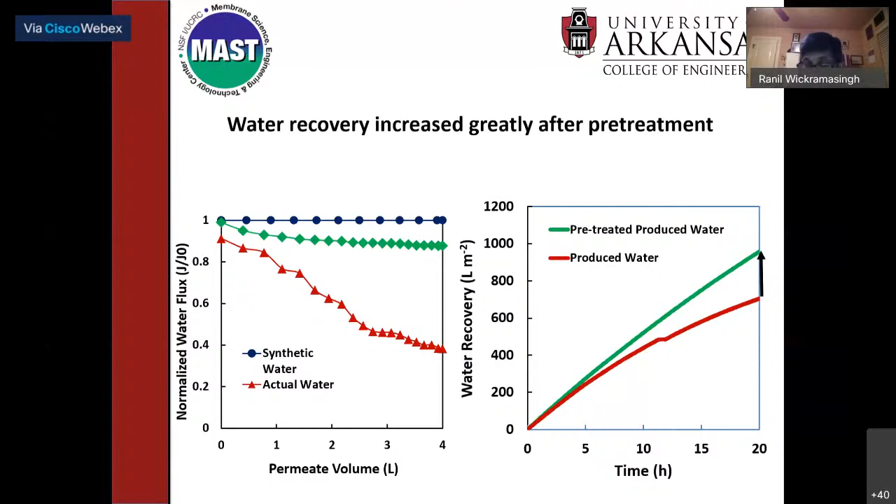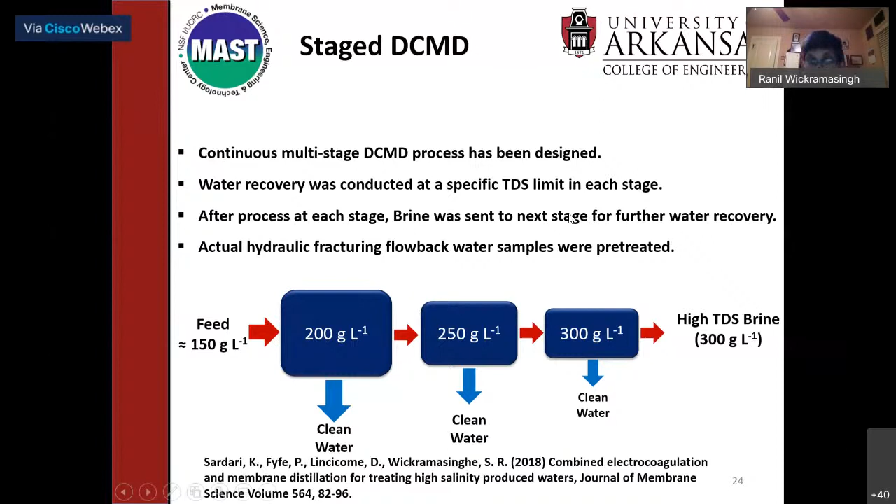Now, you can run a staged process like this, but it turns out you're going to have interstage heating. If you remember at the start of this talk, I said one of the motivations for membrane distillation is that the water comes out of the earth at elevated temperature, so you can capture this energy to drive the separation. It turns out this may not be as simple as it seems, for a few reasons.

One reason is that there's quite a bit of pre-treatment before you get to membrane distillation. Firstly it comes out, there's a chlorine dioxide treatment, then in our case it goes through electrocoagulation, and there's a long sedimentation time. By this time, the heat energy is all lost. The only way you can recover it is if you do heat exchange right at the very start of the process, and that's problematic because the water is highly impaired. It can cause corrosion of your heat exchange equipment, so it may not be feasible.

So in reality, it might be more difficult to make use of this waste heat. Now, the MAST Center sponsor involved in this project was particularly interested in recovering natural gas, so for them, having a heater, as I show here schematically, was not a problem. So we could have heat exchange in each stage.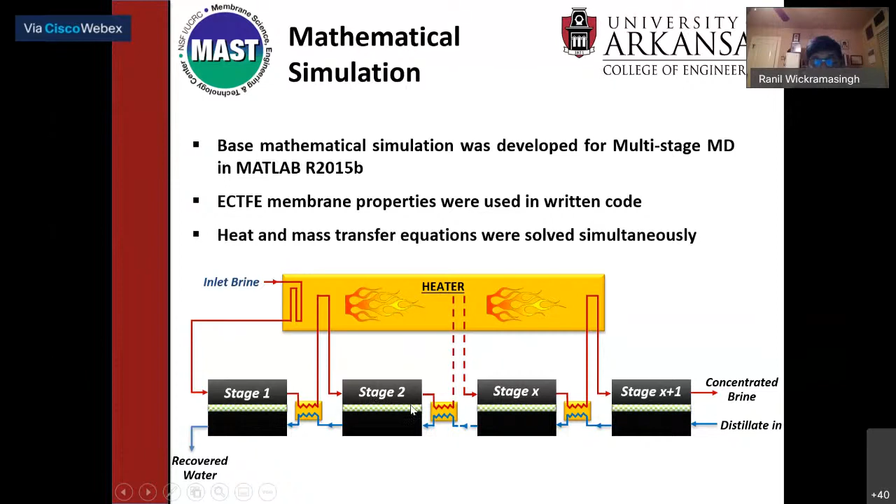Remember, the feed temperature drops as you go through this module, for two reasons. I'm using direct contact membrane distillation, so there is heat loss across the membrane. In addition, you have vaporization on the feed side and condensation on the distillate side, so there's an energy transfer involved in that. But you can have this interstage heating, and again that makes these different stages more efficient rather than having one big stage.

I said I'd tell you about an alternative process. More recently, as given in this recent publication, we've looked at using electrocoagulation followed by microfiltration rather than sedimentation, then going to membrane distillation. What we find is that we can run this into a microfiltration system relatively quickly, basically directly from the electrocoagulation process. That allows us to much more rapidly treat the water and try to develop a continuous process.

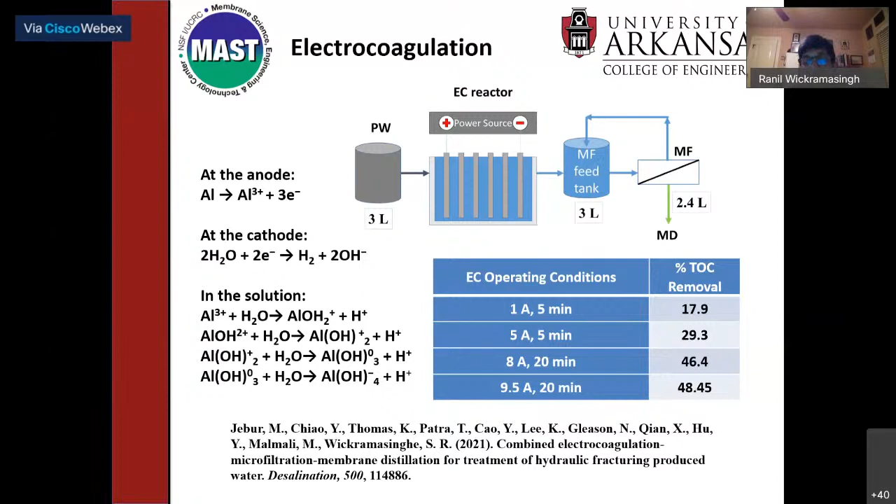But that's another option. Okay, so I said I'd mention forward osmosis. We developed this process to use membrane distillation integrated with electrocoagulation. But it's claimed in the literature that forward osmosis is less fouling since you don't have a hydrostatic pressure force, it's all an osmotic pressure force. The reality is I can tell you that when you're trying to do forward osmosis, you will get fouling, especially for these hydraulic fracturing flowback waters.

So we began by trying to just look at transport across the membrane and solve the convective diffusion equation. If you assume the simplest case, you have a draw solution consisting of, say, deionized water with salt, and your feed is just DI water. What you'll have is an external concentration polarization boundary layer on the draw solute side, internal concentration polarization, and some resistance to mass transfer through the active layer.

If we now have a salt solution on either side but at different concentrations, the concentration profile is similar, except now you could have an external concentration polarization boundary layer on the feed side. In our case, you also have this fouling resistance because we do observe fouling, and again we have to use a pretreatment step, and we use electrocoagulation.

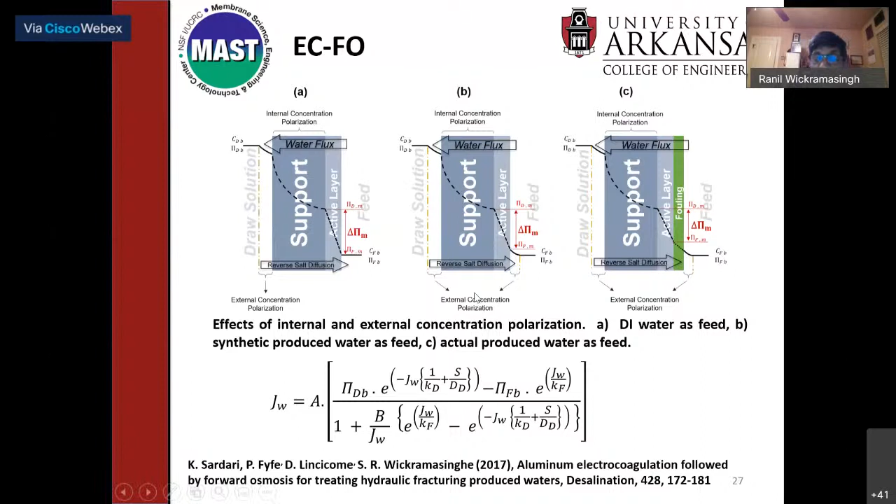Here's the process we were wanting to explore. We take our feed, our produced water, first running it through an electrocoagulation unit, then taking the clear liquid to a forward osmosis step. In forward osmosis, you have the feed on one side and your draw solute on the other side.

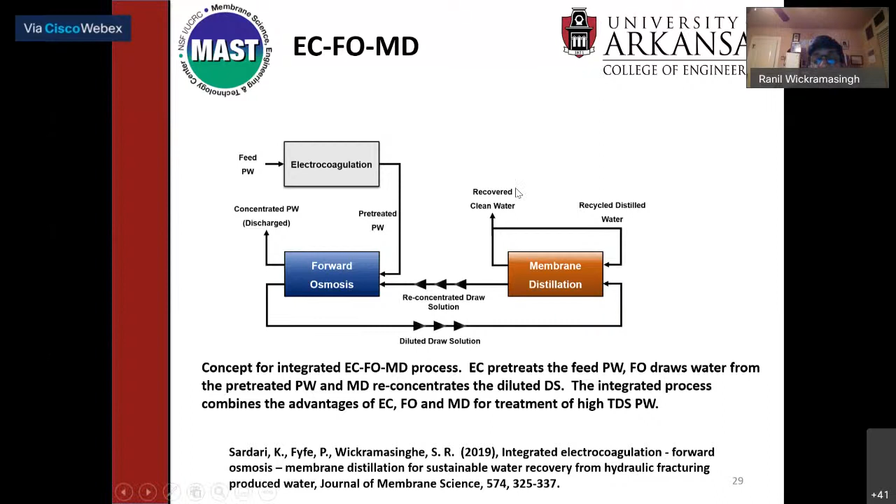This will only work for produced waters that don't have exceedingly high TDS values, since it would be very difficult to find an appropriate draw solute to recover the water. The draw solute gets diluted, and the diluted draw solute is taken to a membrane distillation unit, where we regenerate and concentrate the draw solute, then recover clean water. So that's the process.

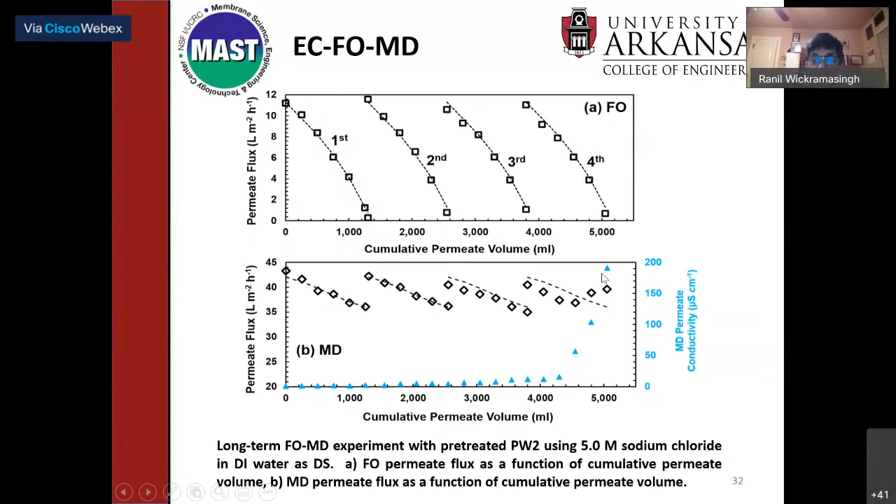The way around that was as follows: we used two membranes, since a staged process is always worth considering. We used our ECTFE membrane to concentrate the draw solute to a certain point, then switched to a different PTFE membrane to concentrate it further, so we could reach the final 5 molar sodium chloride concentration.

So here's the process: we first run forward osmosis to a point, then start regenerating the draw solute with the first membrane, then the second membrane, run forward osmosis again, regenerate with the first membrane, then the second, and so forth. This time, the conductivity of the permeate doesn't increase much.

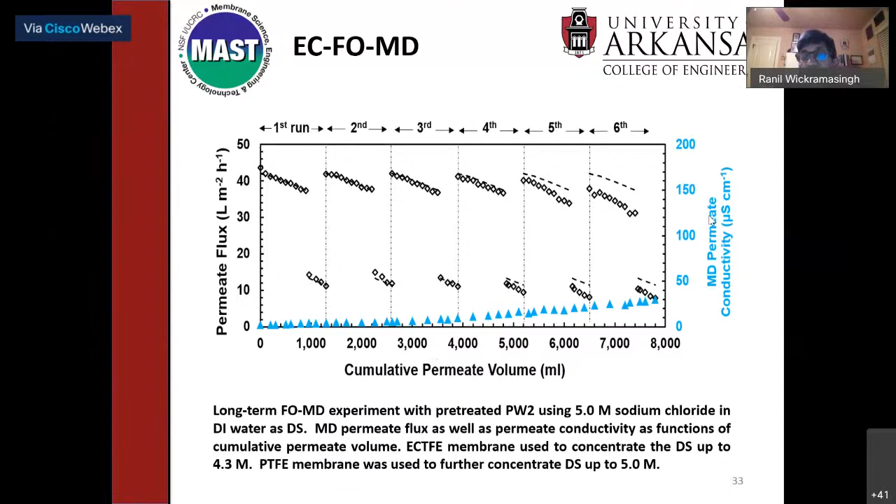Okay, let me move to the last part of this talk, in the last few minutes that I have.

What I hope I have shown you is that the major challenge here is designing a membrane that is fouling resistant and resistant to breakthrough of water. That's a tough problem because the membrane has to be hydrophobic to prevent water from transporting through the membrane pores, but we also have polar and non-polar organic compounds, so it should be oleophobic. Otherwise these compounds adsorb, changing the surface properties and causing breakthrough. What's even more complicated is that surfactants and other low surface energy compounds are present, so simply lowering the surface energy may not be sufficient.

In fact, there's a lot of work looking at designing surfaces with a certain amount of roughness, so we don't just have an enthalpic barrier to adsorption, but also an entropic barrier. So we decided to work in this project with electrospun membranes because they have a rough surface.

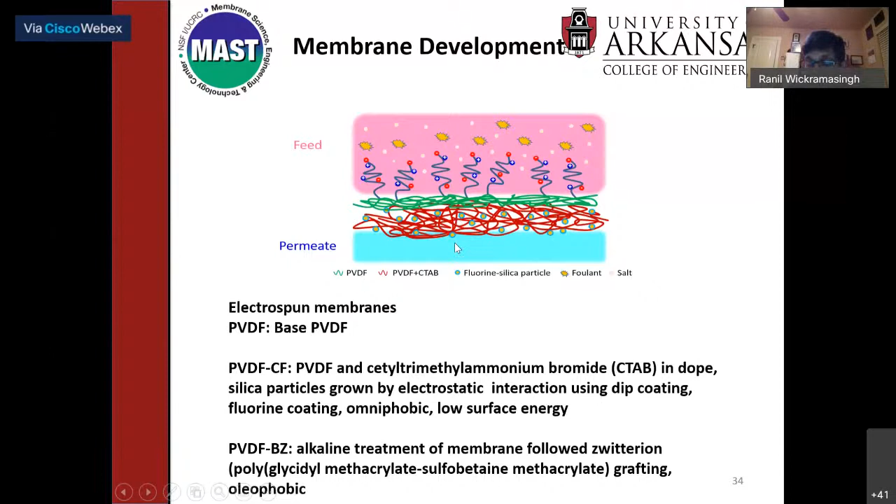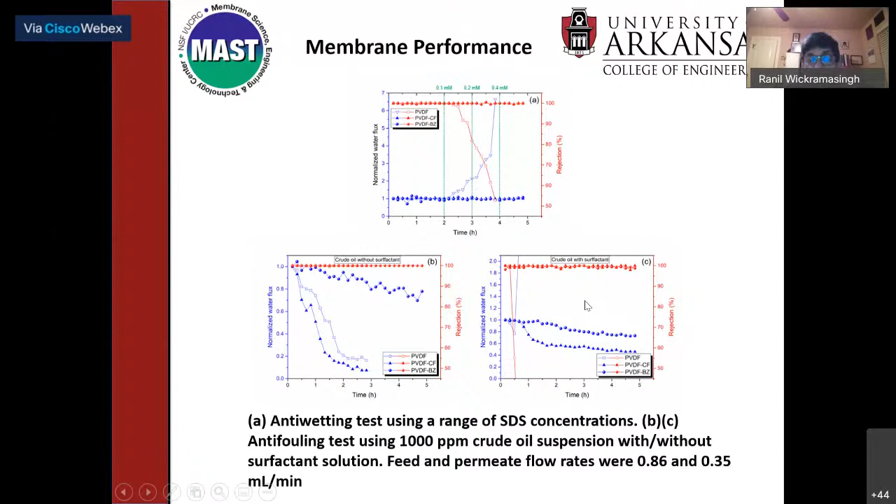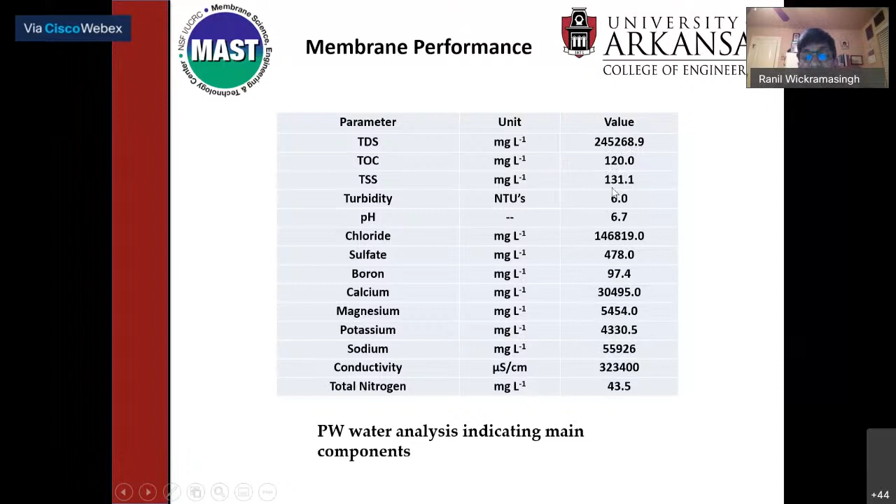So finally, we tested it with a real produced water. This real produced water you can see here has a very, very high TDS of 245,000. Total organic carbon is high. Total suspended solids are high. And this is a breakdown of the inorganic compounds.

So look at what happens. When we look at the top panel, this is what happens with the PVDF membrane. We get almost immediate breakthrough. The conductivity, or the rejection, starts to go up, and the flux drops.

Panel B here on the right-hand side is for the PVDF CF membrane. We don't see breakthrough. We start to see a decrease in flux and a slight increase in rejection, but we don't really see breakthrough yet. For the BZ membrane, the same sort of curve occurs. However, the actual value of the flux is higher than the normalized flux shown.

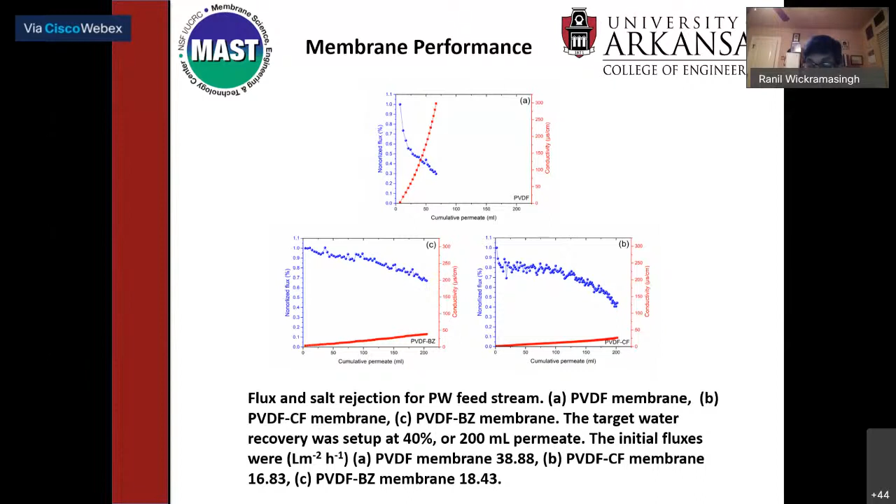So let me conclude, since I think I'm out of time. What I've shown you here is that membrane distillation enables concentration close to the TDS limit if you can prevent fouling and breakthrough of the membrane, close to the solubility limit. The treatment of hydraulic fracturing flowback water is feasible. We show that pre-treatment is essential. Electrocoagulation combined with membrane distillation provides high water recovery, and staged operation is important. I showed you some examples of an integrated process. But what's really important is developing a high-efficiency membrane that prevents fouling and breakthrough, because after breakthrough, it's very, very difficult to regenerate the membrane.